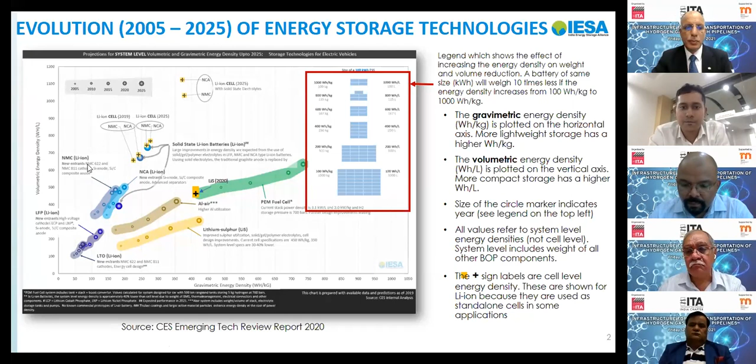One of the reasons why India is looking at green hydrogen is important to understand: India imports almost $150 billion worth of energy every year. The International Energy Agency, NITI Aayog, and every reputed agency in the world predicts that Indian energy demand would double in the next 15 years. If Indian energy demand doubles, our energy import demand in a business-as-usual scenario would also double and become $300 billion.

When India's energy import is $300 billion, what happens to our foreign exchange? Our currency would weaken. So it has significant energy security and economic security issues. We cannot continue this path.

That's exactly why on August 15th, the Honorable Prime Minister of India announced and reiterated the importance of green hydrogen for India, especially in reducing imports and reducing emissions. He pledged that he would like to make India a non-energy-importing country, a zero energy importing country by 100 years of independence or thereabouts. So to meet this ambition, which has multiplier effects across our economy, green hydrogen would play an important role because green hydrogen is a local energy source.

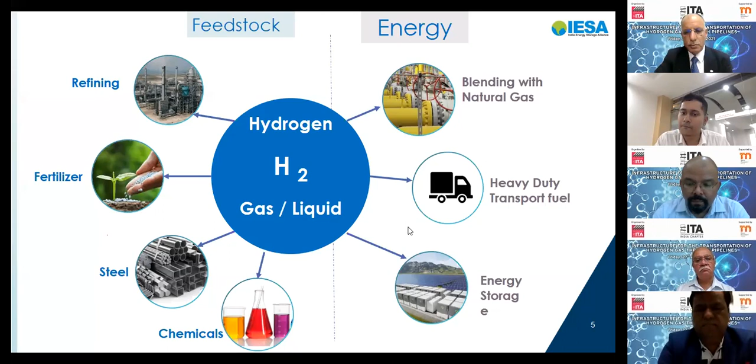So of course, everybody knows there are multiple different types of hydrogen, and many countries are pursuing different kinds of hydrogen depending on their own natural resources. But India's natural resource is nothing but solar and wind. We have coal, but we import 200 million tons of coal. The coal as a percentage of our economy goes up and down, but absolute demand for coal keeps going up. We are not able to satisfy our own coal demand, so we are importing 200 million tons of coal and 50 million tons of coking coal. Because of that, India, even the Honorable Finance Minister in her budget speech, announced that India would focus on a green hydrogen mission exclusively from renewable power sources. So unlike many other countries who are confused between different kinds of hydrogen, India is only seeing one color, and it's green. That's how all the government indication shows.

As I told you before, there are multiple different sectors of hydrogen, but big hydrogen consumers are in the feedstock. New use cases are gas. In the future we see energy applications.

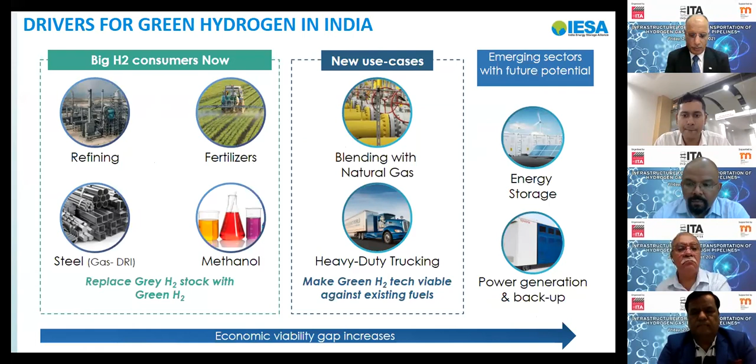The current demand of India is not small when it comes to hydrogen demand. India is already one of the largest consumers of hydrogen in refining and ammonia sectors, and India almost consumes 10% of global demand. In addition to that, India's demand for hydrogen, without any government support, just because of expansions in refining and fertilizers, is going to double. Our current refining capacity in the country is 249 million tons, and India is going to expand to 440 million tons of refining by 2030. With higher and tougher sulfur regulations, more hydrogen would be required to create high quality petrol and diesel.

A lot of studies have been done. TERI, for example, has done a study, and we also have done multiple studies. We see that without any interventions, by 2030 green hydrogen cost would probably come to $2 per kilogram. Multiple people have multiple different opinions on it, there's no one number, but ideally speaking, the government of India and industry's aspirational plan is to reach that $2 by 2025 or 2026. If that happens, gray hydrogen and green hydrogen reach parity, and the demand can scale up quickly. Whenever this $2 is reached, multiple demand sectors would go up.

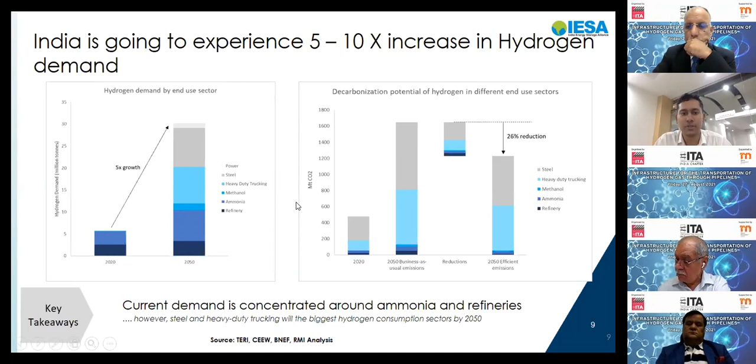IESA, as an industry collective and a think tank, started this initiative in 2020 on mobility and infrastructure with green hydrogen technology. It's across all green hydrogen technologies and across all green hydrogen applications. IESA works to support this and works with 150 other associations across the world to develop and promote this technology. Similarly, collaboration with the pipes, tubes, steel and associated industries would really help in bridging together the knowledge we have. These two industries should come together to make this happen.

Public announcements by the government - the green hydrogen mission document was under works by the MNRE, but they continue to revise it. Multiple times the power minister has announced that green hydrogen purchase obligations for refining and fertilizer sector is supported, and we believe this is the best way to scale up hydrogen. Potentially in the near future, depending on technical data and pilots, even blending for gas is something we may want to promote. There were also announcements about green hydrogen or ammonia tenders by central agencies like SECI, and potential production linked incentives for electrolyzers, because there aren't enough electrolyzers in the world. Without enough electrolyzers, we really cannot make green hydrogen, so India might be one of the largest manufacturers of electrolyzers if the right things are done.

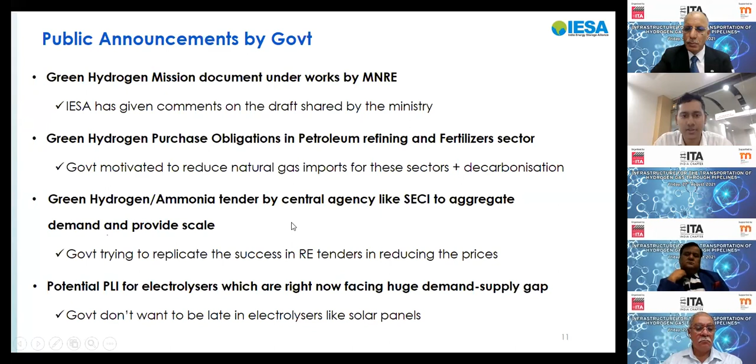We see three kinds of opportunities. One is electrolyzer OEMs and electrolyzer components. The third kind of opportunity relevant to this audience is EPC, pipes, and operation and maintenance - an enormous amount of pipes. Even if hydrogen is produced on site, a significant amount of pipes would still be required to circulate water, oxygen, and wastewater within an electrolysis system, and for taking that hydrogen into demand sectors like refining and fertilizers where pipes are involved. Once significant demand is created and scales are generated, potentially in the medium to long term, even hydrogen-ready pipelines could emerge. For example, in Germany there's a project with centralized large electrolyzers producing large quantities of hydrogen, and through pipelines within a short radius, multiple chemical industries get green hydrogen. Such things might happen once enough demand is created.

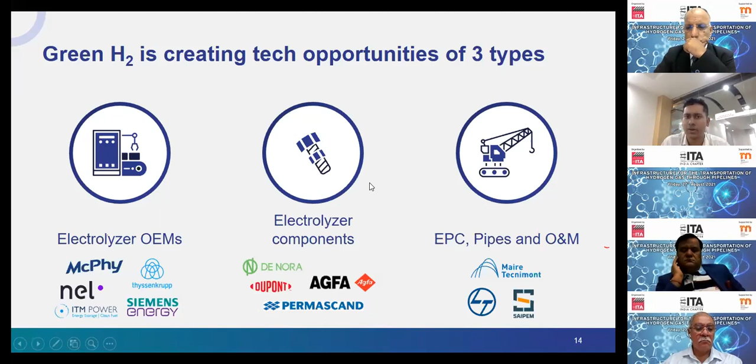Next slide please. Another thing is steel. As I said, steel is one of the largest demand sectors. Again, there's a lot of potential for tubes, pipes, and several other associated technologies. We do see multiple technologies competing with each other - biomass-based technologies, multiple disruptive electrolysis-based technologies - but we believe that direct reduction of hydrogen combined with electric arc furnace could be the potential winner. If that happens, steel would require large quantities of hydrogen, which would also generate a lot of demand for the pipe and tube sector.

Next slide please. We also believe that because we have relatively cheaper hydrogen prices and appropriate cost advantages, in the near term India could be one of the best locations to make green steel. Unlike other technologies where we wait for the world to move first, if the government and industry can work together, India could be among the first countries to move at least a small portion of new capacities into green steel. There are people willing to pay more for green steel, and India-based green steel might be the cheapest green steel across all countries. Our analysis confirms this, and this is a conservative analysis. If Indian green hydrogen reaches $2 or $1.5, it could be a very attractive opportunity for manufacturing and exporting green steel from India, creating a lot of opportunities for this sector.

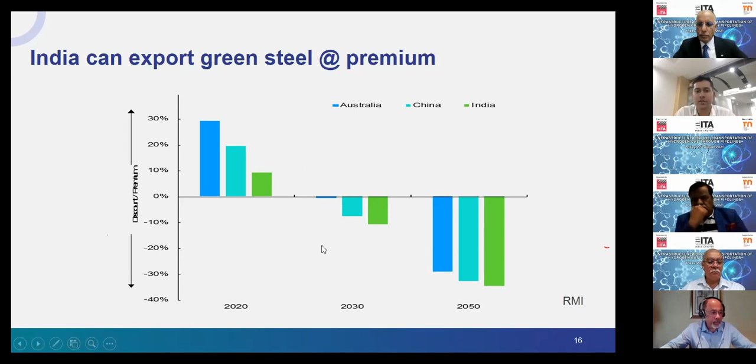Next slide please - this is my last slide, I'll stop here. We believe India is very well placed to capture green hydrogen technology opportunities: a growing market without significant competition like in solar or other sectors with strong Chinese competition, and strong potential for manufacturing cost reduction in pipelines, electrolyzers, and components everywhere, because no one has taken leadership yet. We can be one of the largest producers of hydrogen-ready pipes, hydrogen-ready pipelines, green hydrogen electrolyzers, green fuel cells, etc. We need to build our demand and manufacturing hand in hand.

We are also strategically located close to APAC countries like Singapore, Taiwan, Japan, and Korea, who want hydrogen and depend on it to decarbonize their economies, but don't have renewables, cheap labor, or the project execution capabilities that we have in green technologies like solar and wind. There's strong potential for India to export green hydrogen carriers like ammonia or methanol to these countries, if things are done rightly, with a high degree of localization possible. We believe India is well placed to capture green hydrogen tech opportunities, and we want the pipeline industry to be ready.

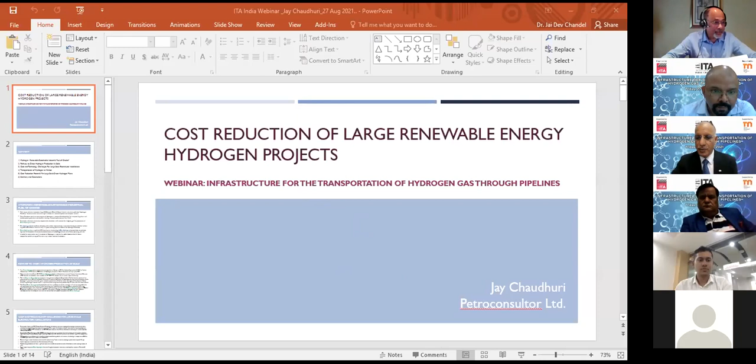In continuation of the previous speaker's speech, it's very appropriate that my slides actually renew and confirm the theme he has expressed. The topic is large renewable energy hydrogen projects. In essence, these are green hydrogen projects and how they can be made economic to the advantage of everybody, particularly those sectors which are hard to abate, as the previous speaker said.

I'll capture the theme in 5 specific areas. Is the renewable sustainable industrial fuel, should it be hydrogen or should it be something else? At the moment, the answer is yes, hydrogen is the prominent competitor. How to get there? How to mark out the pathway so we can produce green hydrogen at scale? Because the challenge for climate issues, to retain a 1.5 degree rise, we need green hydrogen at scale. Otherwise, we are not going to achieve it.

The next topic I'll discuss is what are the immediate cost and technology challenges for large-scale electrolyzer installations, and how to get that hydrogen into the market which is crying out for green hydrogen. In order to make sure the cost of green hydrogen does not exceed current prices these industries use based on fossil fuels, we have to bed in cost reduction. Again, the previous speaker indicated $1 per kilogram of hydrogen is an ideal long-term price range.

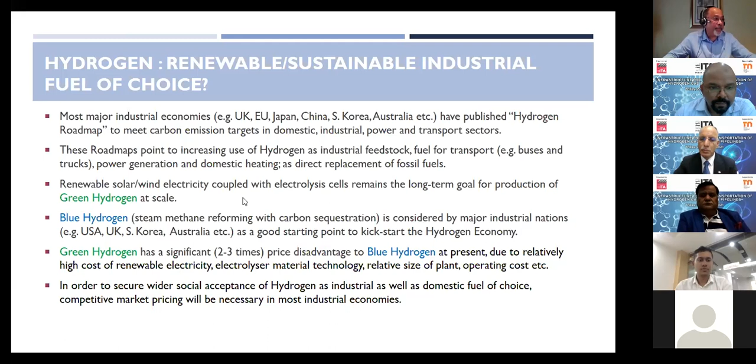Now we're talking about gigawatt size green hydrogen plants. In order to get there, let's capture what has been done so far.

In 2019, Europe started off the first green hydrogen plant at 5 megawatt, shortly followed by Shell's Rhineland refinery in 2021, which produces 1,300 tons of hydrogen per year. In fact, that refinery uses 13,000 tons every year, so the 10 megawatt plant only produces 1/10 of the factory's needs.

Industry is now convinced there's capacity in the market to produce electrolyzers and renewable power. Most European renewable power is fed to homes and industry, so to make room for green hydrogen, plants have to be positioned where there's plentiful wind power to capture.

At least 320 megawatt of green hydrogen schemes are approved, but quite a few schemes are in different stages of planning, ranging between 40 to 200 megawatt.

But most of you have heard that Saudi Arabia is planning the first gigascale green hydrogen project at NEOM city. They plan to produce 4 gigawatt of renewable electricity to produce 650 tons of hydrogen per day, feeding into an ammonia plant.

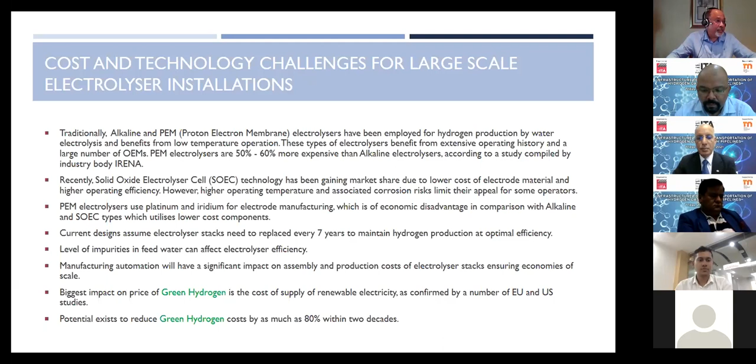Next slide, please. I won't spend too much time on this. This is based on analysis done by the industry association IRENA, which shows where the most impacts are.

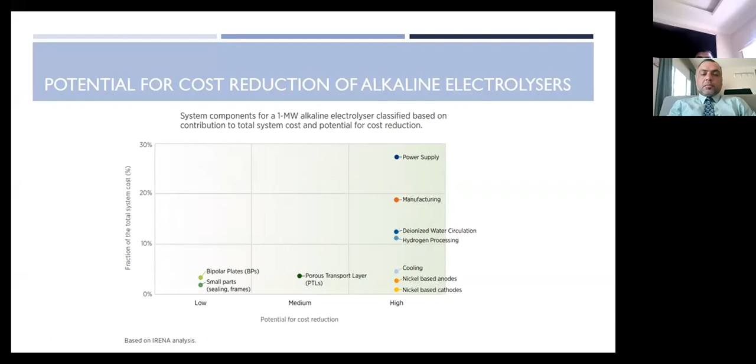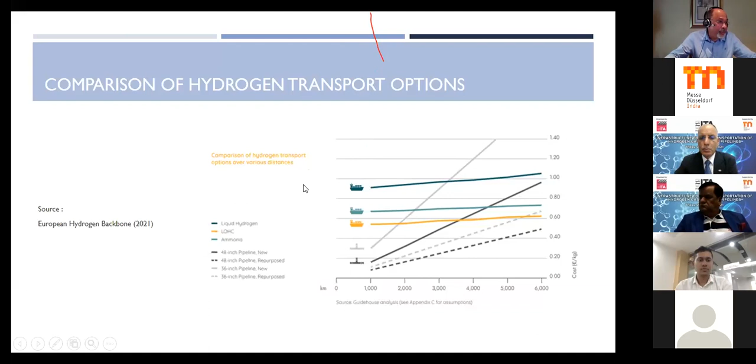So the comparison here is between liquid hydrogen, that's the deep blue line with ship transport, and this is the organic hydrogen carrier, where hydrogen has been dissolved into an organic compound which can then be easily transported. This line is for ammonia, and the rest are pipelines. You can see how, in terms of economy of scale, up to 6,000 kilometers transport distance, repurposed pipelines are the most effective means of transporting hydrogen.

So what are the potentials for industrialization? I've touched briefly on that. The IRENA has captured six key areas. The first is electrolyzer design and construction. The new designs coming in are being made with individual electrolyzers as 5 megawatt units, combined into 20 such units to make a 100 megawatt installation. Very modular. As a result, balance of plant items like piping, storage, pumping, and electricity supply are generated for each 5 megawatt unit. That way, if they need to maintain one part of a 100 or 200 megawatt plant, they don't need to switch off everything. So there's a lot of modularity coming in.

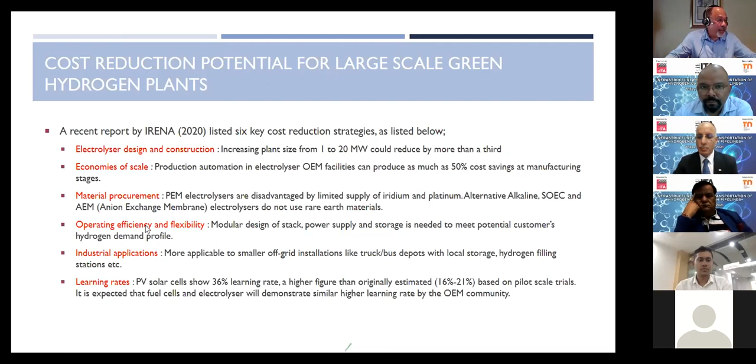So this confirms again the previous presenters' assumptions that it is possible to move the price of hydrogen from around $5 per kg to $1 per kg. This is a possible future, and to get there, the intermediate steps are outlined here, based on an industry analysis that surveyed a number of electrolyzer manufacturers on how to get there.

Okay, so I'm coming to the end. Cost reduction for both CapEx and OpEx for large green hydrogen plants are quite feasible, but the main ingredients, the renewable power cost has to come down, and the electrolyzer stack cost has to come down. Without that, the chance of reaching the $2 goal or $1 goal per kilogram of hydrogen would be remote.

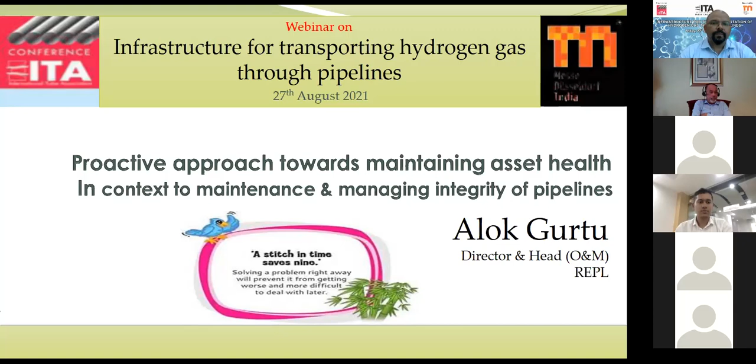Now I would be covering in short what are the different types of assets which are essential to be maintained for any entity to survive. The pipeline is a unique asset, different from plants or other types of assets, due to the risk involved in pipeline transportation. I'll cover the traditional approach - how pipelines have been maintained in the past, how integrity has been managed in the past, and what is the current practice through the integrity management system. Then focusing on preventive and predictive maintenance techniques, typical maintenance and repair activities on pipelines, and of course the conclusion.

You will all agree that the workforce who handle and operate physical assets need always to be fit and healthy. Otherwise, how would they be able to operate and maintain the critical assets of plants or pipelines? So we should give maximum attention to the health of our employees. In the present pandemic, we have seen how companies have taken proactive measures to ensure all their employees are vaccinated so that work does not suffer.

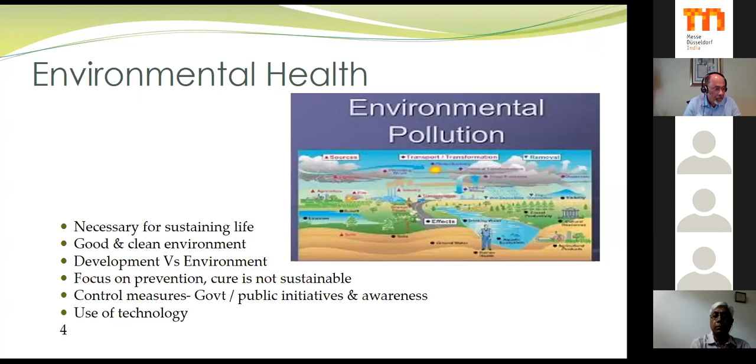You may also be aware that for any cross-country pipeline project, we have to take various environmental and forest permissions from government agencies, like the pollution control boards, the Ministry of Environment, Forest, and Climate Change. This is, of course, necessary for sustaining life on this planet, giving a good and clean environment to society. So maintaining environment is also an important aspect of any integrity management system.

Now, the financial health - without a sound financial health, no entity or even any country can afford to create a network of pipelines and thereafter maintain its health. As we know well, pipelines are highly capital intensive projects, and therefore the financial health of the entity has to be very sound in order to sustain pipeline operations, or in fact any business.

The intellectual assets - in our quest to maintain these physical assets, we often tend to lose focus on our employees, who basically are the brain behind operating and maintaining these physical assets. High attrition rate in any organization could be an area of concern and could result in compromising safety and integrity of the physical assets.

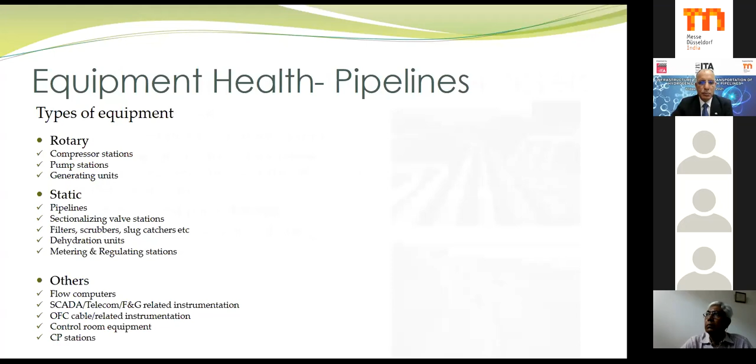Now coming back to the subject of maintaining integrity of pipeline assets, which can broadly be classified into rotary, static, and others - you will find typical compressor stations or pump stations, which basically compress the fluids in order to maintain flow, the pipeline itself, and the various valves, filters, etc., which are installed en route on the pipeline, are also important. So we see these are the typical assets, the health of which has to be maintained in order to keep them always fit for purpose.

Now, for people who have worked in the operation and maintenance of pipelines, it's well known that this is quite different from assets of any other plant. Most of the pipeline, the cross-country part, is buried deep underground, not visible to people. They pass through difficult terrains like water bodies and forests, and most importantly, they are vulnerable to third-party damage, which is one of the greatest threats to pipeline integrity. It contains a huge stored amount of energy, especially for gases, and in case of rupture or leak, we have seen how disastrous it could be.

Now, incidents or accidents can happen anywhere in the pipelines - it can happen in plants, it can happen anywhere, maybe in air, road, or water. But we have seen that for pipelines it is a little different compared to plants, because pipelines pass through very remote areas and very highly populated areas. There are no facilities available to control fire or disaster, so we have to depend maybe on government agencies, or sharing resources from other organizations. Whereas in a plant, we have facilities available, so in case of any incident it can be easily controlled. So this is how it is a challenge, especially to face emergencies in the pipelines.

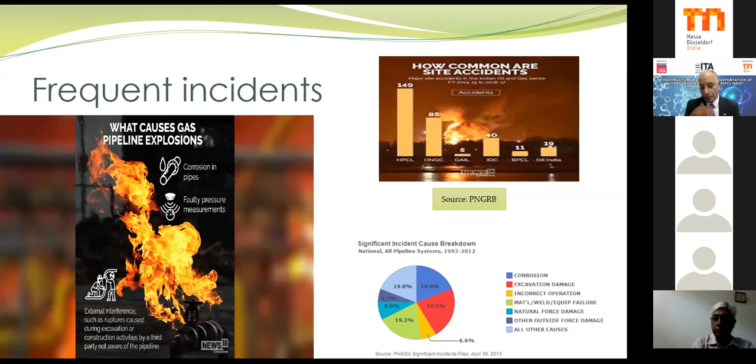Once the hazards are identified, we go for vulnerability study for each of these hazards - who all are vulnerable, maybe the people, property, or the environment, which could be vulnerable, especially for the pipelines. Finally, the impact analysis can quantify the complete losses resulting out of any untoward incident. It could be tangible or intangible. And the most important amongst all is basically the loss in reputation of the company, which could take years to build up. So here, the companies have to safeguard.

For the people who have been involved in design, construction, operation, and maintenance of pipelines way back in the 70s or 80s, for people like us who have worked during those times, we know very well how much importance was given to the pipelines at that time. The philosophy was just build, bury, and forget. And this used to happen - there used to be frequent breakdowns, leaks. People used to put clamps on the pipelines and then move ahead.

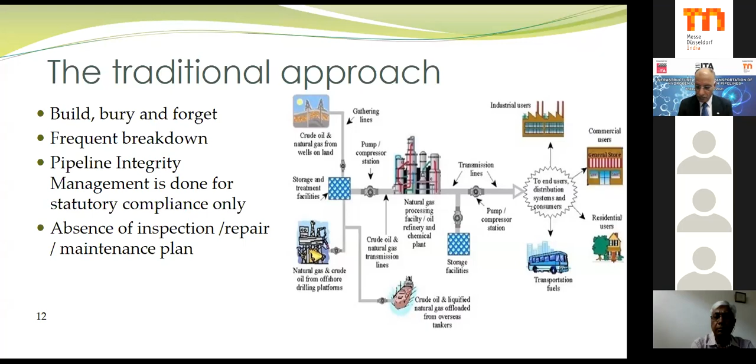And there was some acceptance of leaks at that time, though now all the companies have almost zero leak target - KPI is zero leak. So this is the traditional approach. And now, as you see...

There has been constant pressure from the public and the government, which has made the regulators also press the companies to have a robust integrity management program. We know that any incident, however small, has the potential to cause a lot of damage in terms of money, damage to the environment, and even loss of valuable lives. We have seen in recent times some accidents of pipelines in India and how the public outcry has been there, besides a lot of pressure from government agencies to immediately suspend operations. This always happens. It could severely impact the business and create negative perception in society, which could take years and years to overcome.

As we are stepping into the business of hydrogen transportation through pipelines in India, we have to be very careful and conservative in designing the high-pressure cross-country pipeline systems, as the product hydrogen is somewhat unique and even more hazardous with respect to the normal petroleum products which we transport through pipelines.

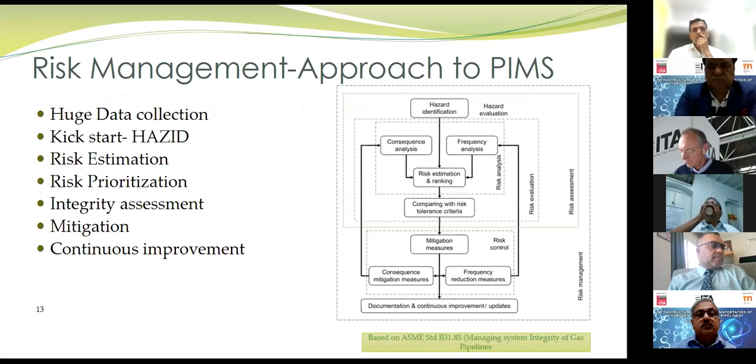Now this is basically a typical approach to the pipeline integrity management system - we call it PIMS. I need not amplify the importance of this integrity management system, as it is not only essential for the safety and reliability of pipeline operations, but it is now a mandatory requirement from the statutory and regulatory bodies, especially the PNGRB, which is now in existence. The process flow chart of PIMS you can see here is based on...

B31.8S - this is basically for natural gas and petroleum pipelines. For hydrogen pipelines, I believe the integrity management plan and emergency response plan would be a little more stringent compared to natural gas, due to the more hazardous characteristics of hydrogen. So it is yet to be - I think there are no regulations as on date. As and when these pipelines come in India, there would be basically a separate integrity management plan. Though the basics would remain the same, the nitty-gritties of the integrity management, the mitigation measures and all that would be a little different as compared to petroleum products.

Now, notwithstanding all that I have spoken so far, what is basically the essence of my talk? I have centered my discussion on 'a stitch in time saves nine,' meaning that maintenance or inspection done well in advance has enormous potential to save precious resources, which otherwise would have been spent many, many times more in the repair of pipelines. So a proactive approach focusing on preventive and predictive maintenance is the right choice, particularly for pipelines, where the stakes are very high and no operator would like to risk business or loss in reputation. Another famous saying that fits very appropriately for pipeline transportation is: prevention is better than cure.

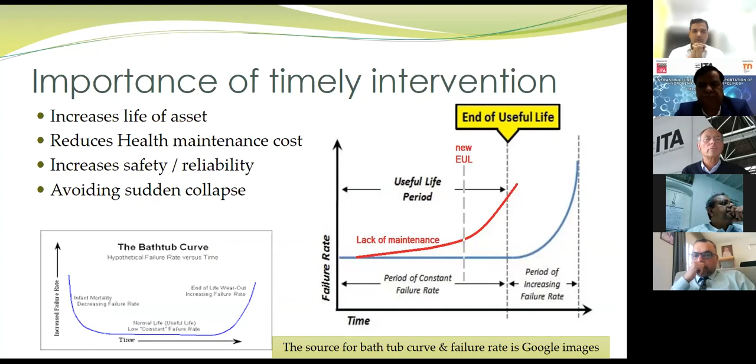For example, if it is a main line, you would require hot tapping and stoppling operations for maintenance. You can see how the failure rate increases as pipelines grow older, and most of our petroleum pipelines in India are beyond their design life. Even the HBJ pipeline, laid by GAIL way back in 1987, has now crossed its design life, and many more pipelines belonging to Indian Oil or Oil India are now quite old, and the failure rate increases with time.

And if you don't maintain it, if there's a lack of maintenance, it could increase exponentially and lead to sudden collapse or failure, which is not desirable and could be very disastrous. So we have to be very careful and always try to be proactive and rely on preventive maintenance techniques like intelligent pigging or smart pigging, so that we know in advance what the defects in the pipeline are.

And we can take mitigation measures. The typical maintenance and repair activities for pipelines are somewhat different from those of plants, where a lot of emphasis is on various surveys, because the pipeline is spread over long distances, beyond the geographical boundaries of the plants. A lot of surveys like aerial surveys, line walks, CP surveys, are required as part of the integrity management plan to ensure the pipeline is always fit for purpose.

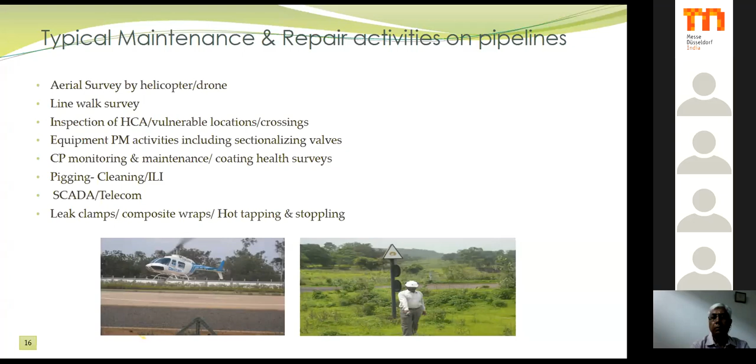Otherwise, somebody would tap the pipeline, somebody would damage it, which could result in serious consequences. The repair part is also a little different from conventional repair techniques. We use specialized equipment like hot tapping and stoppling, where we make repairs on the pipeline while it is in operation, and can prevent huge production losses.

Now, to conclude, I would like to emphasize again that the proactive approach towards maintenance of all types of assets is not only imperative to run operations safely, but also to sustain the business in the long run. Now, out of all the assets we have discussed, I would urge the industry to pay utmost importance to retaining skilled and competent manpower, without which it would be difficult to run pipeline operations or any other critical operations requiring special skills.

Now, this is the problem which the pipeline industry, or some of the oil and gas industries, is facing - a high attrition rate. There are no experienced people available for pipelines, so companies are facing a lot of issues of attrition as on date. The pipeline density in our country is still very low compared to developed countries, so the future of pipelines appears very promising.

I would once again urge the audience to always remember two famous sayings: penny wise, pound foolish, which we should always avoid, because there's always a tendency to save some amount of money, and later it ends up costing almost double or triple the amount saved. So it is always better to avoid being penny wise and pound foolish - we should never follow that - and always try to follow the proverb, a stitch in time saves nine.

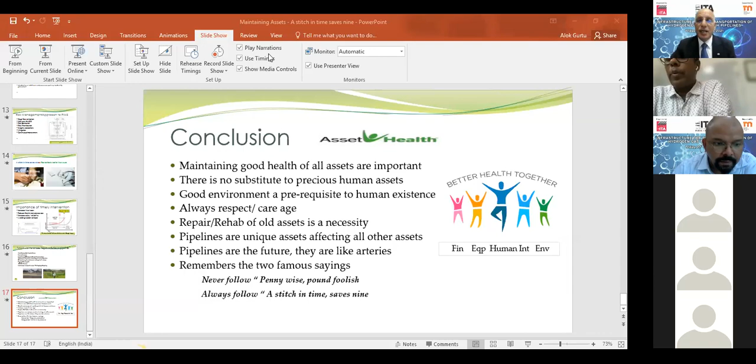Thank you. Thank you for this introduction. I hope I am audible. You're audible. Thanks, let me share your presentation. Yes, please. Yeah.

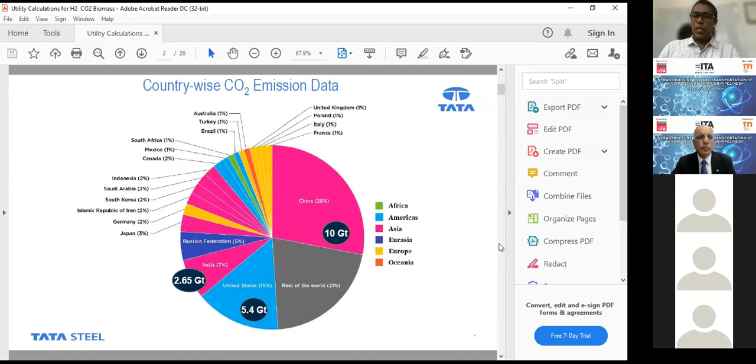India is emitting around 2.65 gigatons of CO2 per year, and we come third in the world in terms of emission. If we move to the next slide, we will see that 8.5% of this actually comes from the steel industry. So the decarbonization of the steel industry is essential, and this is what we'll deal with today.

So the IPCC has given us four representative concentration pathways. We all know the temperature of the Earth is increasing, and the most acceptable pathway is RCP 2.6, which talks about limiting the increase to 2 degrees. This is where we must contain the temperature of the Earth in order to save mankind. So how do we do this?

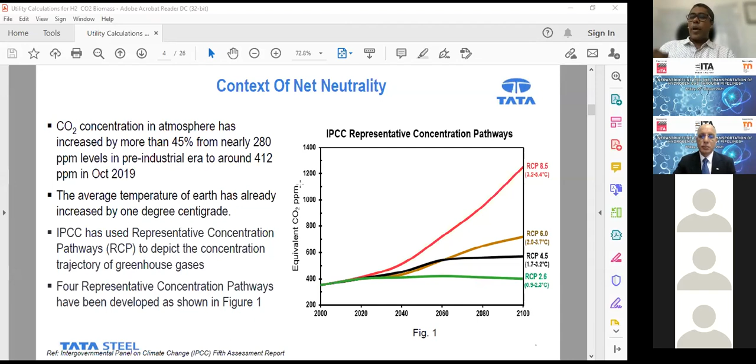There is a methodology where the carbon dioxide concentration in the atmosphere must be limited to 450 ppm. Right now it is about 415 ppm, and we have only about 35 ppm in our hands. To achieve that 450 ppm target, we need to reach a net zero scenario in the world by 2050. If we talk about net zero scenario in the world, we are also talking about the net zero scenario in the steel industry. Let us see what the challenges are and how we could achieve this.

In Europe or even in China, it is going to decrease. So even if we have technologies to reduce the CO2 emission per ton of crude steel, the total emission is going to increase because our steel production is going to increase from about 120 million tons to 400 million tons by mid-century. That is why the challenge for India is most difficult to achieve this net zero target.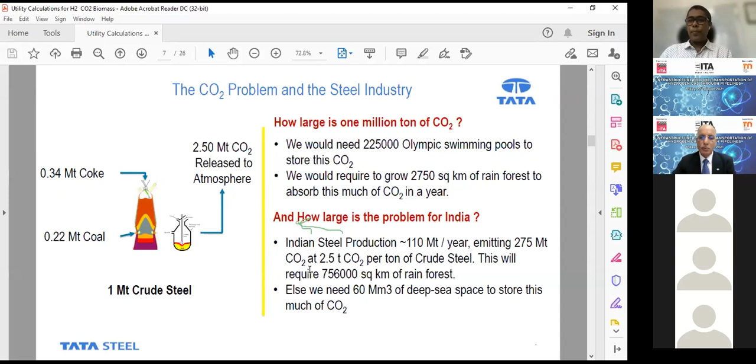Here we show the emission at different production stations. You can see that 70% of the total CO2 emission comes from the blast furnace. The blast furnace is where we make iron, not steel, and this is where our concentration would be in order to decarbonize quickly.

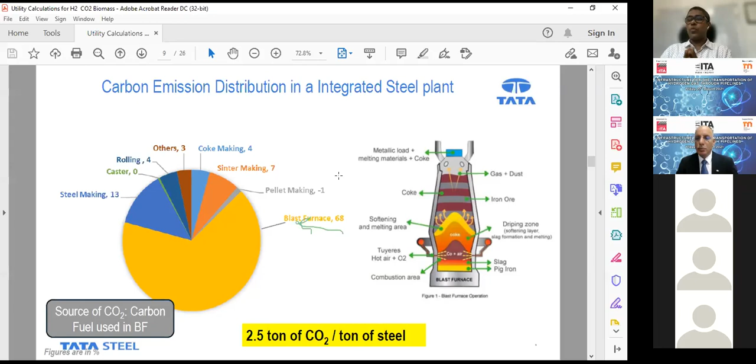There are other ways of making iron, like DRI technology, which is available commercially. Here coke is not used for making iron, but natural gas is used instead. The carbon dioxide emission is also less, about 1.4 tons of CO2 per ton of crude steel. But there's a problem because this process requires natural gas, and India doesn't have its own big reserve of natural gas. Also, the natural gas cost in India is quite high, about $11 to $12 per MMBTU.

So it's not really something that will give the steel industry any profit after making the steel. And overnight changing from blast furnace technology to DRI technology would also not be feasible because of the capital investment.

So what is the way? How can blast furnace be decarbonized? One way is that efficiencies can be improved and should be improved in order to decrease CO2 emission. But another way is to inject hydrogen-bearing gases into blast furnace. Hydrogen-bearing gases means it could be syngas, it could be hydrogen as well. That will reduce the specific emission by 0.2 tons per ton of crude steel. So that means it reduces, but it doesn't bring us to net zero.

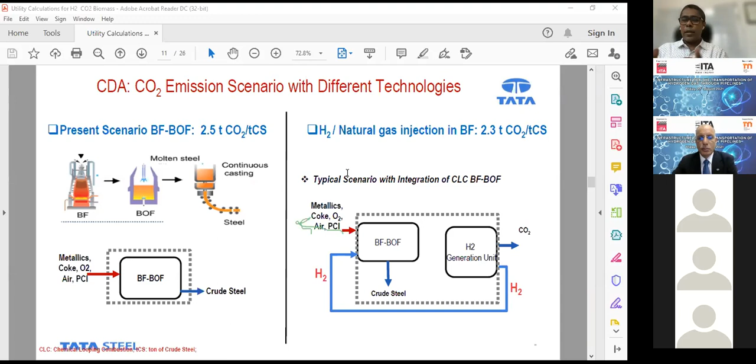In the short term, this is one of the methods we must take, along with using more scrap in the steel, and using more and more DRI in place of blast furnaces. But all of this would not help us come to a net zero scenario. So what is the net zero scenario and how can we achieve it? Let us discuss.

There are two major challenges here. The first challenge is the production of economically viable green hydrogen. And second is development of technologies for carbon capture and use or sequestration.

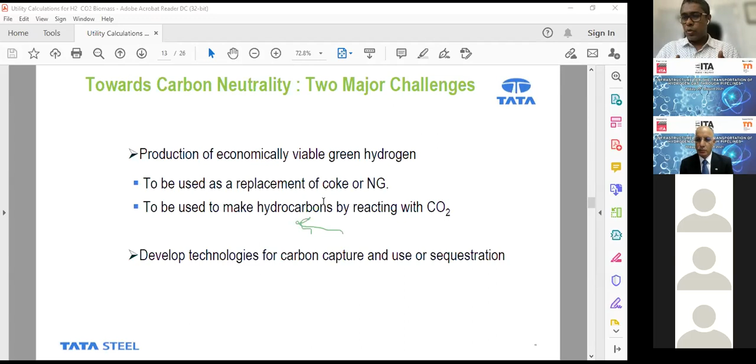Now, let me describe why hydrogen is used, why it is told to be a good avenue to decarbonize steel. It is not just about energy. It is also about its power to reduce oxides. Hydrogen is a much better reducing agent than any of the carbon-based reducing agents. That's why hydrogen is so popular, and it has to be used in a manner that ensures we reduce the use of coke and bring the total emission to zero.

In Tata Steel, we have taken a three-pronged approach to tackle this problem. The first is direct carbon avoidance, where we replace polluting blast furnaces with different technologies, using hydrogen as a fuel. The second is carbon capture and utilization. Why not sequestration? Because the geography of India is not good enough for any sequestration of CO2, but utilization would be possible. And in utilization too, we would require hydrogen in order to make hydrocarbons from the captured CO2.

Tata Steel has already piloted the capture technology here in Jamshedpur, and we are also going to make a pilot plant to convert it into different alcohols. But in both cases, for CCU or for direct carbon avoidance, we require green hydrogen. So that would be the center point of research and technology development for the next few decades.

This slide describes on the x-axis the volume of hydrogen that can be used in a technology, and on the y-axis the tons of CO2 emitted per ton of crude steel produced. In the left-hand upper corner, you can see common technologies for iron making, which cannot take a lot of hydrogen into the system, so the emission will always be high. But DRI technology, supplied by Midrex or HYL-ZR, already takes 50 to 60% hydrogen as input, and they are developing further toward 100% hydrogen as reducing agent. When that happens, total carbon emission will come down to zero. That is the most popular and probable pathway to net zero.

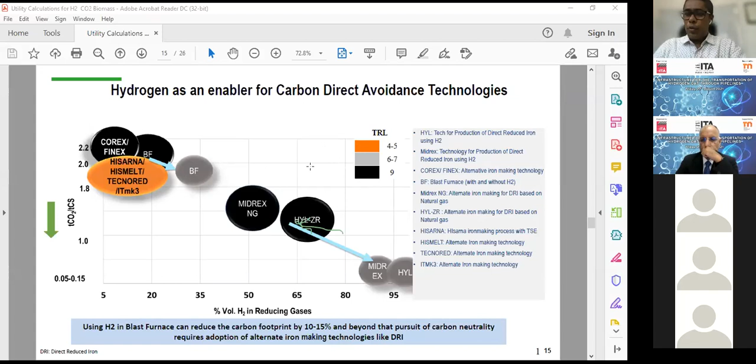In Europe, there are already programs, as was mentioned during the introduction of this seminar, like Salcos, and programs taken up by ArcelorMittal and POSCO, where hydrogen is going to be used to produce steel in place of coke, used in different forms of DRI.

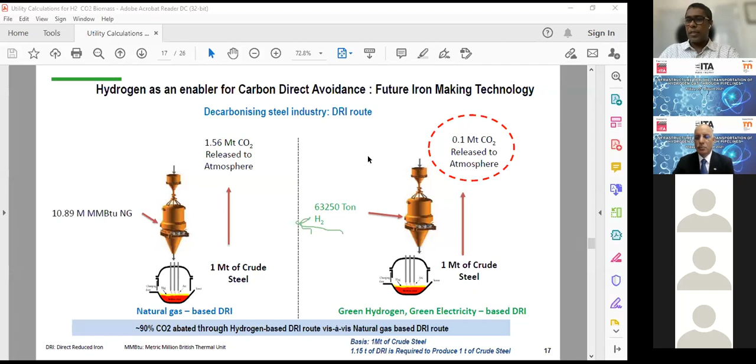That will bring the emission to almost zero, as pointed out here. But then, of course, you have to multiply this number with the amount that you have to produce as a country in terms of the growth in the steel sector that we have already discussed. Next slide, please.

I'll not go into detail, but I must mention two things here. One good thing about hydrogen in the steel industry is that we don't need very pure hydrogen. We actually need about 80% pure hydrogen. Of course, it should not have sulfur in it, and it should not have a lot of CO2 in it.

Let us say we have a mixture of some amount of 80% hydrogen with some amount of CO and some amount of nitrogen. It will be a good idea to use this in blast furnaces, also in the DRI. So we are not really planning for something which is very pure.

I'll not go into the Tata Steel specific plans, but the cost we are aiming for is actually less than $1. I can't show the detailed analysis, but $1 is the break-even point for the future, and the CO2 footprint, of course, has to be as low as possible.

Currently we're discussing co-creating or co-locating these hydrogen units with the steel plant. But even after that, transportation will be important, because a lot of hydrogen will need to be transported from one place to the other. That is why transportation and steel development for transporting such a gas would be important.

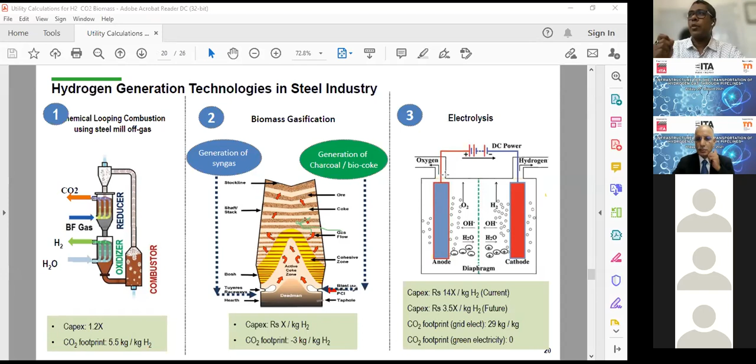Quickly, what resources are required? For electricity requirement for electrolyzers, for 1 million ton of hydrogen we require 52 terawatt hours of electricity. For the biomass route, for 1 million ton of hydrogen we would require 13 million ton of biomass. So this has to be streamlined.

The resources are available in India, but we have to streamline the supply chain.

Here you're talking about developing a product which needs to be sold. So what we are finding right now is that alcohol, methanol, or ethanol are the two products which would be given emphasis in the future.

This is what we are trying to do in Tata Steel as well.

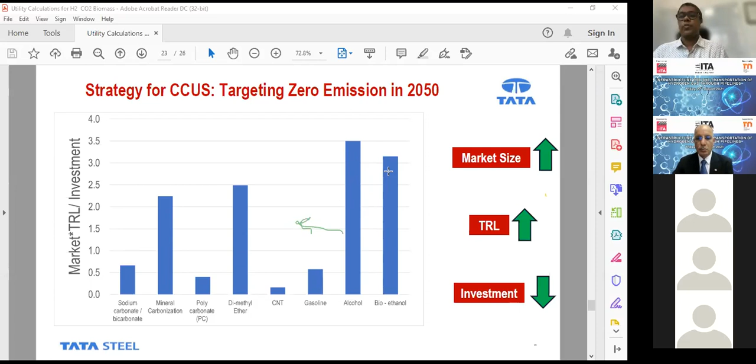Next slide, please. I'll not go into the concluding remarks. In the next slide, I've just acknowledged a few of my team members. If the moderator could show that.

Next slide. Yeah, these are the team members working with me in Tata Steel. Thank you very much.

Thank you, Mr. Kundu, for a very informative presentation on the usage of hydrogen in iron making and steel making. This is surely a future for a country like ours. Thank you very much.

This is my presentation sequence. I'll briefly speak about Welspun, then the critical requirement for line pipe steel making. Then I'll be talking about hydrogen transmission and distribution pipelines, then a brief on CO2 pipeline and the way forward. Next slide, sir.

Welspun is top 3 among the line pipe manufacturers globally. 50+ approvals from oil and gas majors qualify for global bidding. 15+ million metric tons of pipelines already delivered.

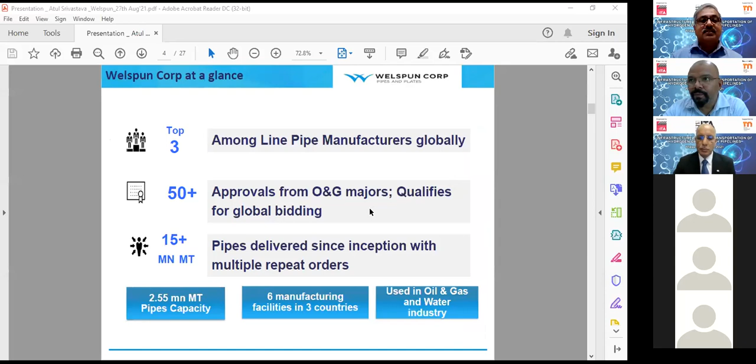Next slide, sir, I'll just run through this. We have different products: the HSAW pipes, the LSAW pipes, the ERW pipes. We are coming up with the DI pipes in the coming couple of months. Next.

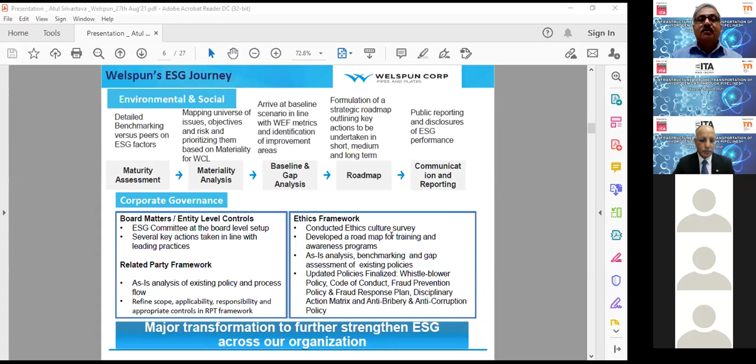As it has become a necessity now rather than a choice, we have to go through this journey of environment, social, and governance. Welspun, as a very responsible organization, is also going through this journey where we have planned for various environmental, social and corporate governance framework. Next slide, sir.

The sustainability targets Welspun Corp has taken are net carbon neutral by 2040, water neutral by 2040, zero waste to landfill by 2040, and subsequent parameters. It's a target which we are aggressively working on, and again, it is not a choice now, it's a necessity.

Next slide, sir. Then I'll run through some critical parameters required to develop steel for 100% hydrogen transportation, based on the current specification and data available. As we are aware, a lot of research is going on across the globe to develop line pipe in compliance with industry requirements. But fundamentally the chemistry design should be low carbon, with highly optimized carbon equivalent and PCM, and optimized titanium-nitrogen ratio.

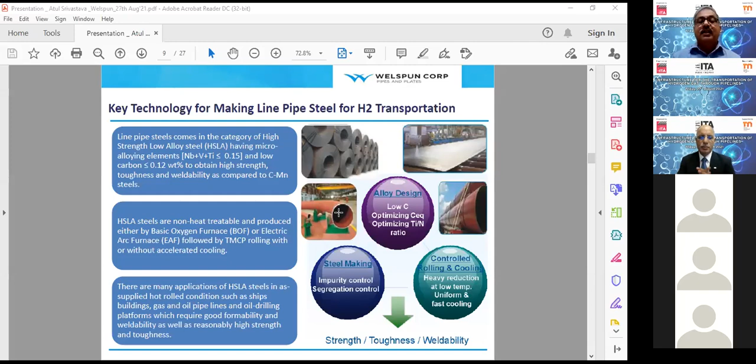The steel should be as clean as possible with minimum segregation, and with heavy reduction at low temperature and uniform fast cooling. That is the essence of TMCP rolling, which most of the mills in the world can do right now. Next slide, please, sir.

This is a typical flow chart of steel making. Blast furnace - Dr. Saurabh Kundu talked a lot about blast furnace - that is meant for liquid metal. Then you have the desulfurization unit. Then you have to remove the phosphorus, take it through LF for chemistry control, then go for degassing and calcium treatment to make the steel absolutely clean.

Try to go for a vertical caster, which will minimize the inclusion into the casting. Many of the mills have a curved caster, but still with soft reduction and some other features they can control the requirement. Next slide, please.

The TMCP rolling is going to be very important. I'll not go into the details, but this is from one of our very esteemed steel suppliers. What is very critically required for steel to qualify for 100% hydrogen transportation is a fine grain structure.

Preferably 5 micron, microstructure of more ferrite and bainite, preferably granular bainite or acicular ferrite, without any trace of pearlite - pearlite will be very harmful for transportation. The hardness has to be restricted to 220 HV10 for the base, and 235 HV10 for the line pipe, including the weld and HAZ. So next slide, sir.

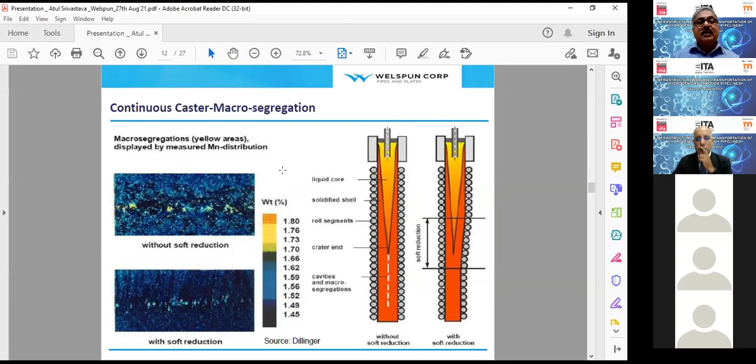Next slide. This is a summary of absolute clean steel. The numbers are given for sulfur, phosphorus, tramp elements, and control of centerline segregation, which is very, very important. Alloy design for resistance to hydrogen embrittlement should be such that carbon is low, with a combination of chrome, nickel, moly, niobium for a grade like X70.

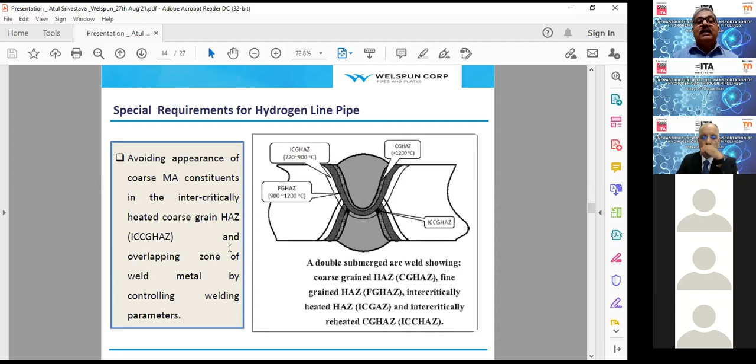Next slide. That's a typical cross section of the weld joint. We have to have the weld as well as the HAZ in control, so that failure does not happen from these critical areas.

Next slide. Hydrogen pipelines - there are almost 359 projects already announced globally, with an investment of almost $500 billion.

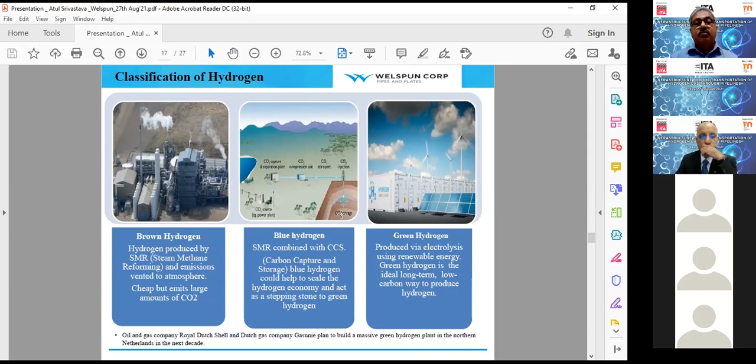Next slide. This is nothing new, my esteemed colleagues have already spoken about it - brown hydrogen, blue hydrogen, and green hydrogen. Next slide, sir. Hydrogen pipeline.

There are almost 1,600 miles of pipelines already existing in the United States operating with hydrogen. Europe has obviously taken up several projects to transport hydrogen through pipelines. My other speakers have already spoken about it.

The critical challenges we see, or what needs to be catered to while designing proper steel for hydrogen pipelines, where a lot of research is happening, include the potential for hydrogen to embrittle the steel used to fabricate pipelines, the need to control hydrogen permeation and leaks, and the need for lower cost, more reliable and more durable hydrogen compression technology to increase pressure so larger volumes can be transported in smaller diameter pipes.

One possibility for rapidly expanding hydrogen delivery infrastructure is to adapt part of the natural gas delivery infrastructure to accommodate hydrogen - this is what repurposing of existing pipelines is about. It can be 10%, 15%, or 20% - it's case-to-case basis, there's no standard thumb rule available at the moment. It can be started immediately and subsequently shifted to 100% hydrogen with new infrastructure.

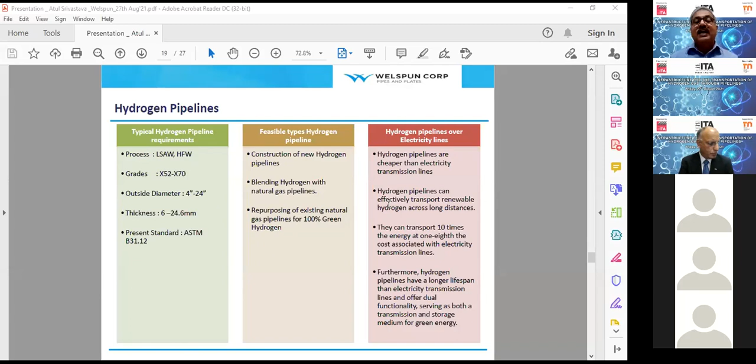Next slide, sir. Hydrogen transmission and distribution pipelines - again, it's a comparison between onshore transmission pipelines, subsea transmission pipelines, and distribution pipelines. These numbers are already available in the public domain, so I'll not spend much time on this, because this is something which is evolving continuously with more and more research and data coming in.

Next slide. This is again a comparison - distribution, transmission, pipeline, shipping, and trucking. If you see, it is more effective to use pipelines, whether retrofitted or new. It still works well for a good distance of transportation.

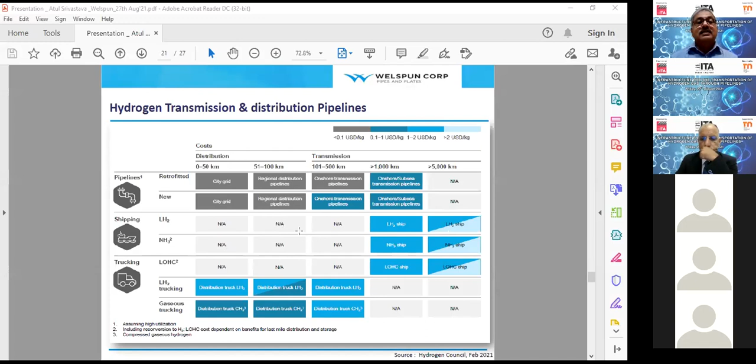And when it's a long cross-country pipeline, obviously steel, then you have to go into the specifics of steels and the correct welding and jointing issues. That is something as compared to the new pipeline.

A brief on the CO2 pipelines. There is an existing DNV recommended practice which was concluded last year, and it is already available for use. ASME B31.4 talks about it, DNV F101 also talks about it, and obviously API 5L is there.

The typical requirement coming in is thickness of 5.2 to 27 mm. Diameter is from 152 millimeter to 1219. And the pressure being talked about is 21 bar to 200 bar. These are based on projects which are either under advanced FEED or being designed now.

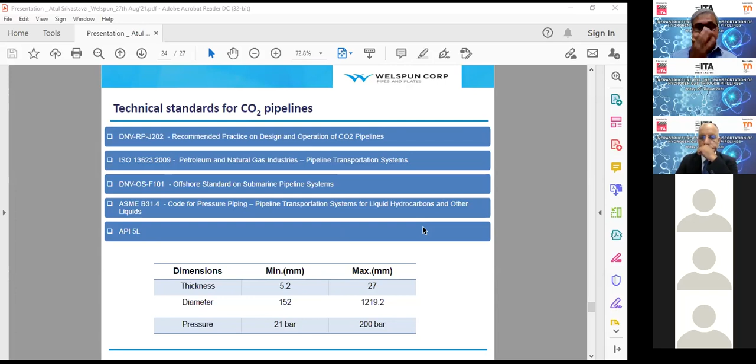It is not like a lot of research is still needed for CO2, so obviously the specifications are available. It's much easier as compared to hydrogen. Hydrogen will evolve in the next 1.5 to 2 years. We'll have a lot of information available, and all the concerns related to safety and criticality will be addressed.

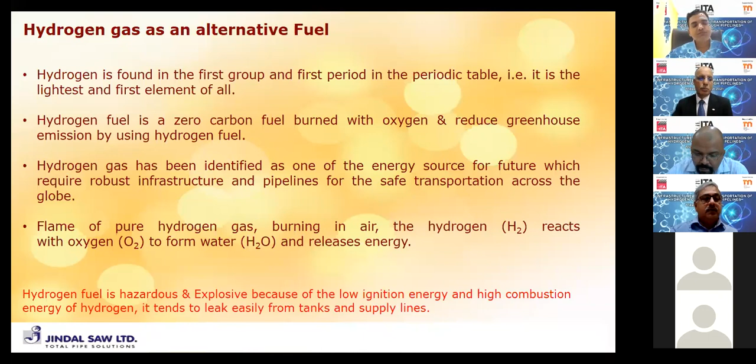Pipelines are the blood vessels, you can say, of any country, in which we transport gas, crude oil, or even water. But here we are talking about hydrogen pipelines, because pipelines are the safest mode of transportation, more reliable and less hazardous, and we can transport the gas at lower transportation cost.

But there are many challenges to transport hydrogen. We need a steel which has sulfur and phosphorus control, because if the steel is not capable of handling hydrogen assisted fatigue cracking, it may have hydrogen embrittlement, causing strength and toughness loss due to hydrogen embrittlement. This can affect the surface or even subsurface.

If it is molecular hydrogen and it dissociates, as per Sievert's law, the ionic hydrogen can trap into the pores. It can go to high stress areas and increase the brittleness.

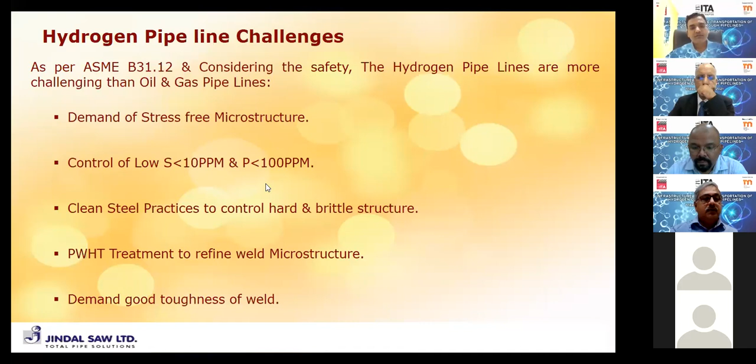Which kind of steel can we use in hydrogen gas pipelines? We can use carbon manganese steel, which is normally used in API pipelines. We can use stainless steel, clad steel, plastics and composites. But there are certain limitations of using carbon manganese steel and plastics, which may have embrittlement. So the best solution is to use stainless steel, especially 316 grade.

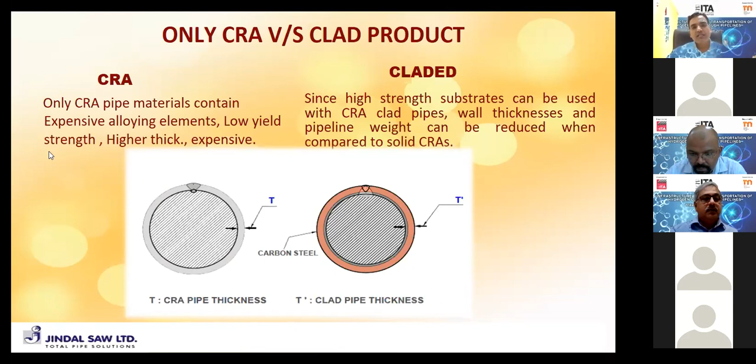So we are talking about corrosion resistant alloy, which can be used for hydrogen gas transmission, versus clad product. If we use a pipe complete with CRA, or a cladded pipe with CRA plus a backer steel, meaning carbon steel, we can have a cost benefit and a weight benefit. That can be discussed in the next slide.

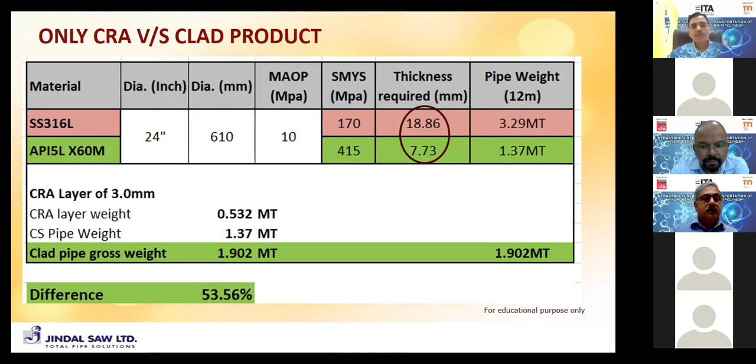So the cladding advantage: we already know that the corrosion resistive material is inside the carbon steel, and it's very economical because there is less weight we can use during construction.

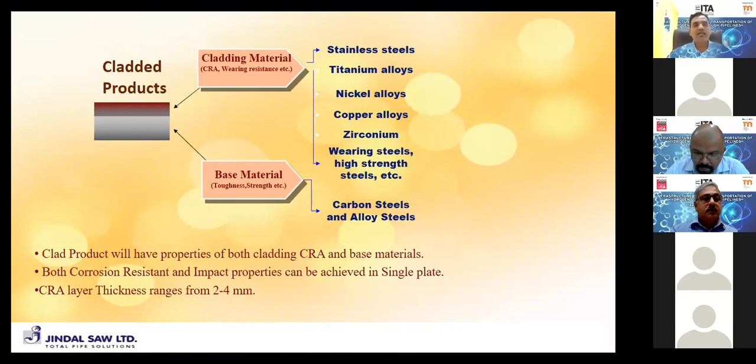So what material can be used? As I said, stainless steel can be used as CRA, titanium alloys, nickel alloys, copper, zirconium, and the backer base material can be carbon steel or alloy steel. Normally the CRA layer would be 2 to 4 millimeters depending on the design of the pipeline.

So there are a few processes for producing clad pipes. One is the metallurgical bonding process, another is the mechanical bonding process. Metallurgical bonding fuses both materials, CRA and the backer, meaning carbon steel. There are 3 categories: roll bonding, explosion bonding, or weld overlay. The next category is mechanical bonding, where there is no fusion between the CRA layer and the carbon steel - that is mechanically lined. So these are the 2 main processes we can use.

As I discussed, the plate can be used to form large diameter pipes. There is a backer, which can be carbon steel or low alloy steel, and there will be a clad - the backing steel will be cladded with the CRA, corrosion resistant alloy.

Now I will discuss the roll bonding process. As we already discussed about steel making, there will be 2 materials: one is the cladding material, another is the base metal of carbon steel, that is joined and sealed together and then rolled. After rolling, it is split into 2 parts, and after cleaning and cutting, that can be used for pipe making. So this is one process which comes under metallurgical bonded plates.

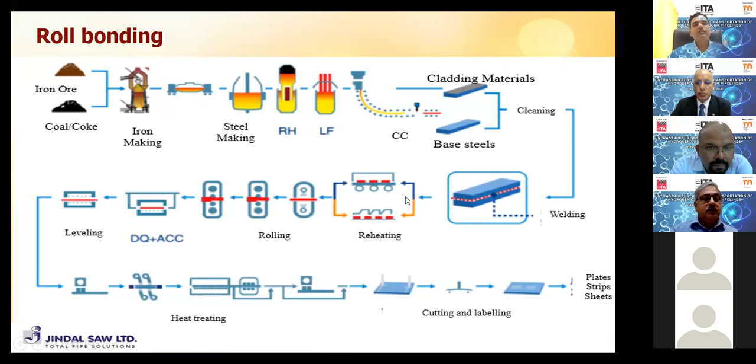Another process is explosion bonding. In this, already produced plates like carbon steel and alloy steel are assembled - the backer, meaning carbon steel, will be at the bottom side, and then CRA will be placed over the backing steel, and then TNT is used to blast it, creating the explosion. Once this explosion is completed, the plate is flattened, tested, and uniformly cut for further processing.

Next process is we can use the weld overlay process to produce the cladded pipes. The processes can be electroslag, strip cladding, sub-arc, flux core, GMAW, tungsten, and SMAW.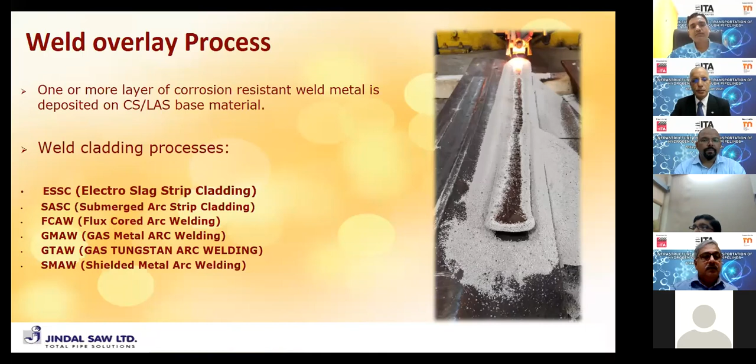There are some limitations over these weld overlay processes. The problem with weld overlay is we have to deposit more to get the lowest dilution. If we deposit less, then dilution from the base metal will be more, so we will not get the accurate chemistry on the surface of the CRA. This is a costly process and has other problems. The base metal is heated and the properties of the backer can be altered, so care has to be taken during the weld overlay process.

As discussed about the problem with weld overlay, there will be loss of strength and toughness. Residual stress will be developed during welding, and distortion will be there. The consumable cost will be high because we have to deposit more material to get the desired chemistry.

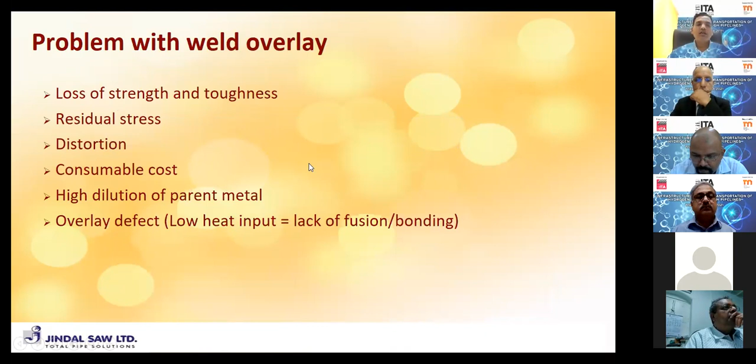Mr. Kamal, please complete it in 2-3 minutes. Yes sir, I will definitely try to finish it in a few minutes.

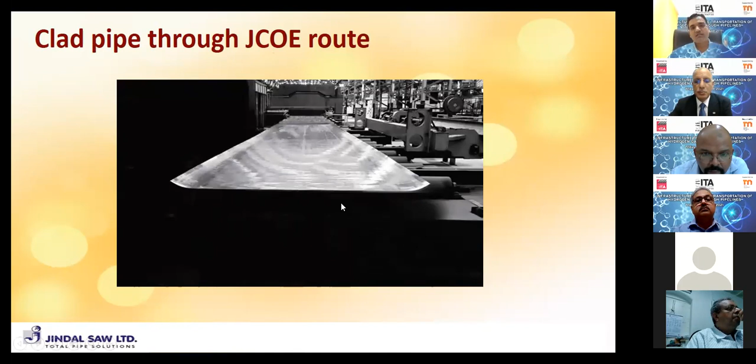I will discuss the clad manufacturing which we have undertaken at our Jindal Saw facility. The pipe is produced by the JCOE process, and you can see this electroslag welding process underneath. We have produced the pipe from a JCOE route, which everybody is aware about I hope.

This is very crucial for the clad pipe. If we are not doing the proper joint preparation, we will end up with many defects and cracking. So we have to remove the CRA like this, as seen in picture 1. After removing and preparing the bevel of the plate, we process the tacking at the OD, then sub arc at ID and OD, completing the joint. The clad weld, done by electroslag welding, is completed to restore the CRA layer.

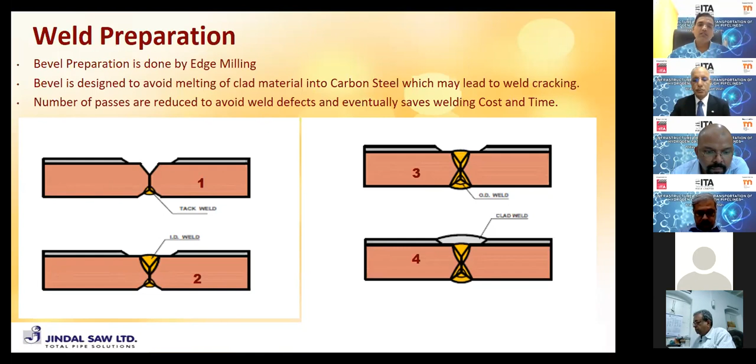We have used normal carbon steel consumable, which are widely used in pipe mills, like ER70S-6, and titanium boron wire, and the strip that is 316L.

The chemical composition of flux: for sub-arc welding we have used an aluminate basic flux, but for the electroslag welding, the CaF2 calcium fluoride basic flux is used.

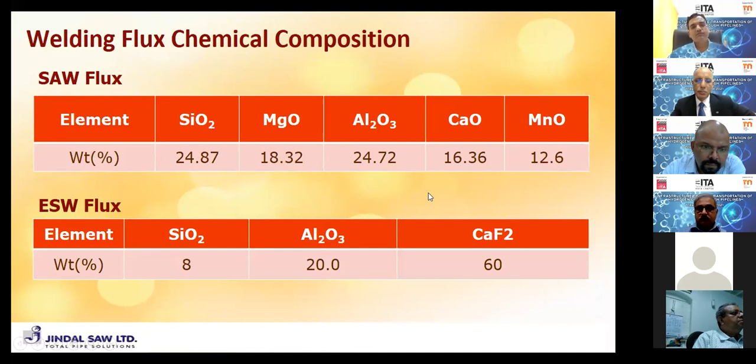We have achieved the chemistry of the CRA layer as required per API 5LD, which is a specification for clad pipe manufacturing. The nickel requirement is 10 to 15, so we achieved 11.91, the chromium achieved is 17.51, and moly is 2.41, so that is within the standard requirement.

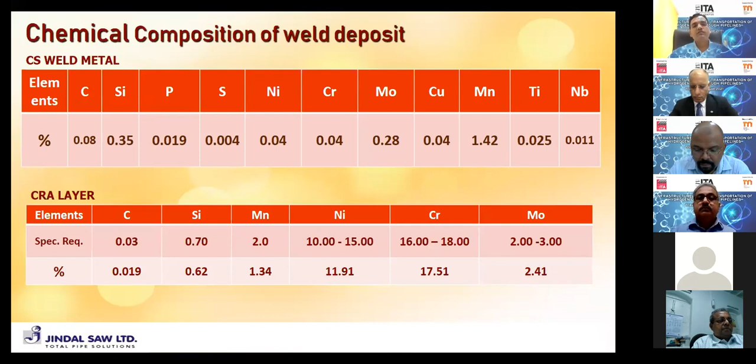This is a macro of the complete weld joint, including the electroslag layer. It's complete - you can see the complete joint penetration and complete fusion.

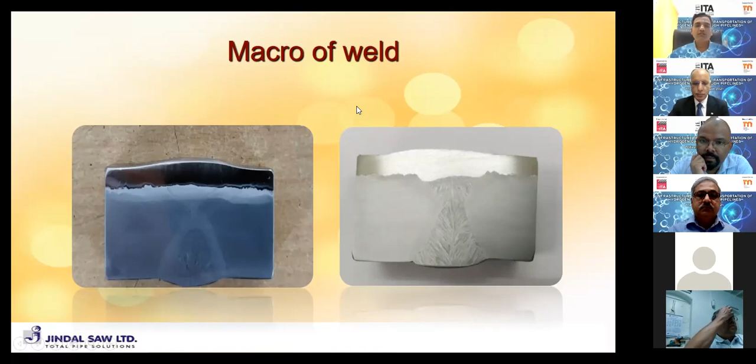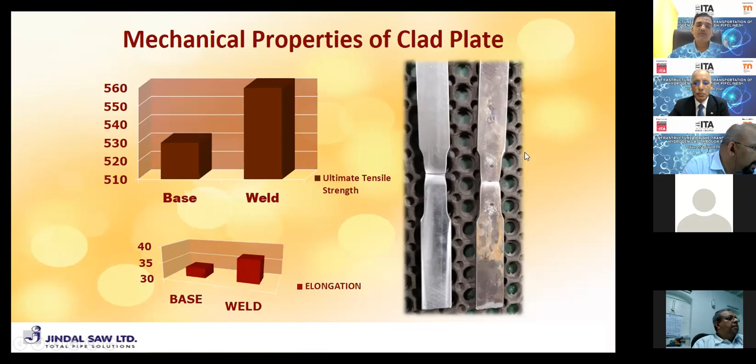For mechanical properties, the tensile tests we conducted met the required properties. For toughness, we conducted base metal, fusion line, and weld metal toughness tests before and after the electroslag process, and there is a difference. In the weld metal we could achieve 182 joules at -20, but after completion of electroslag it slightly improved because our microstructure gets refined from the electroslag process.

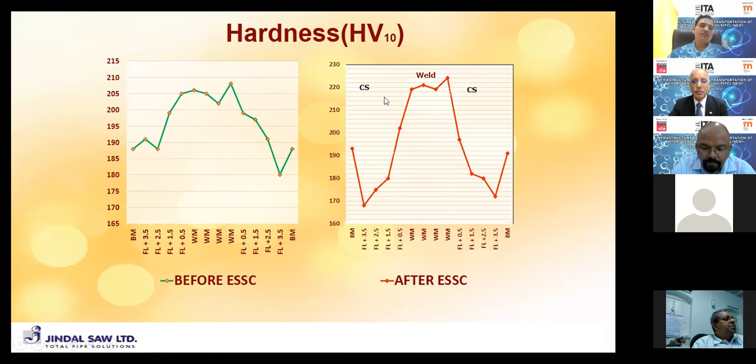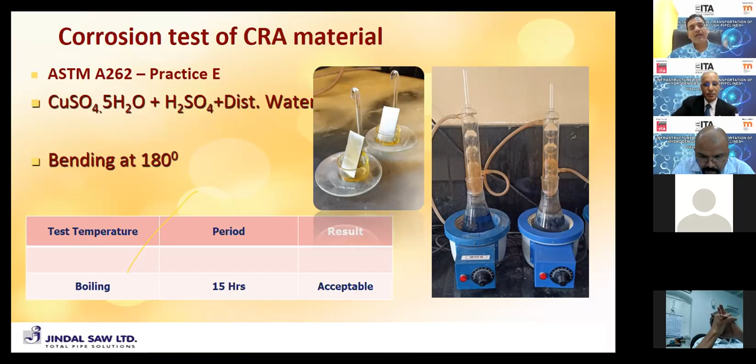Next, we conducted the corrosion test also as per ASTM practice E, where we have used copper sulfate and sulfuric acid solution, and we boiled it at a certain temperature for 15 hours, and after completion of that we bent it and found there are no cracks.

So in conclusion, we can manufacture the clad pipes by getting the pre-cladded plates, and that will definitely work in a highly corrosive environment and hydrogen gas transmission. Our properties were well within the range, and that's it.